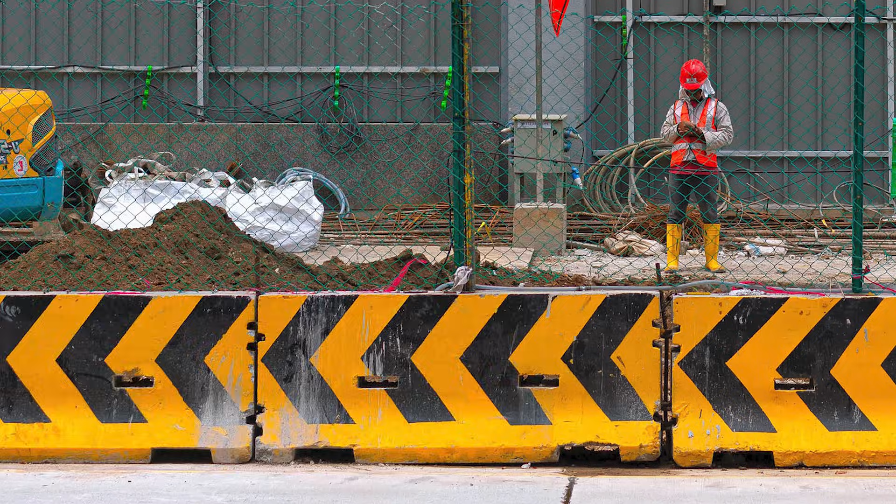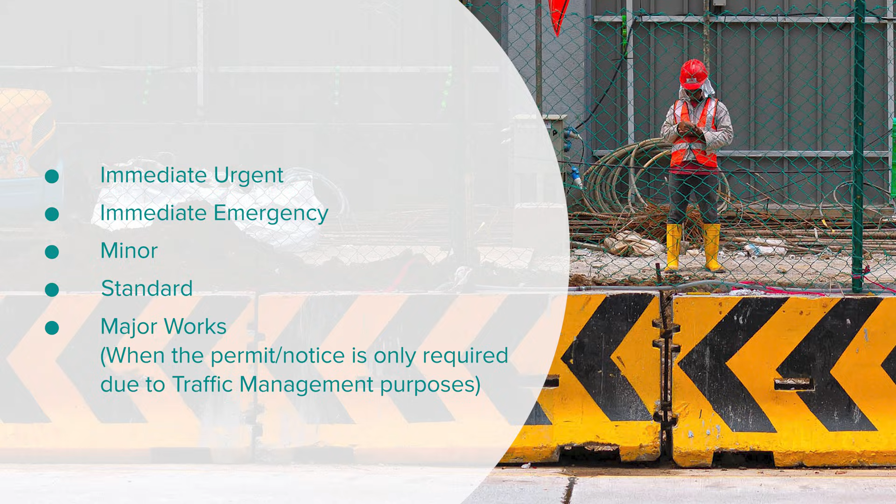From the 1st of October 2025, the Street Works UK protocol comes into place for all streetworks operating under immediate urgent, immediate emergency, minor, standard, major works when the permit or notice is only required due to traffic management purposes or equivalent notice periods for works on private land.

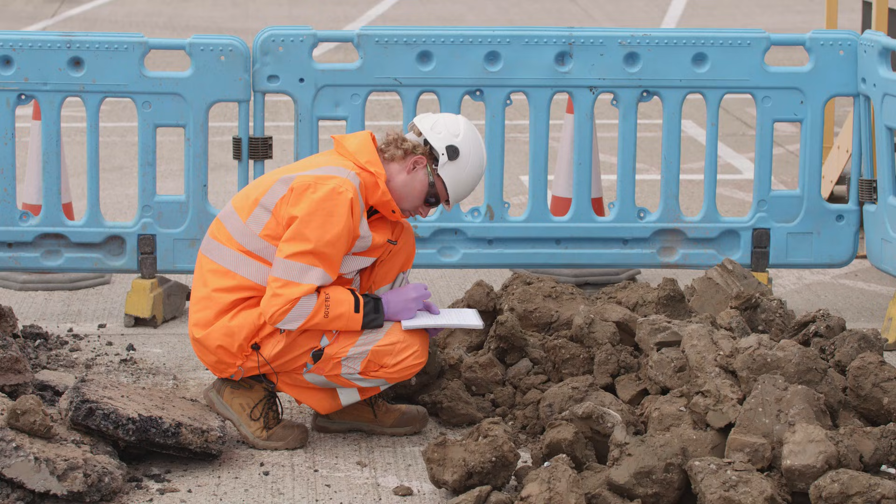The protocol requires a set of changes to current working practices, and the chapters in this video provide an outline of the requirements for individuals currently carrying out streetworks duties. It is a legal requirement to follow the requirements of the protocol, which are outlined in this video. Compliance will be checked and non-compliance enforced by the Environment Agency.

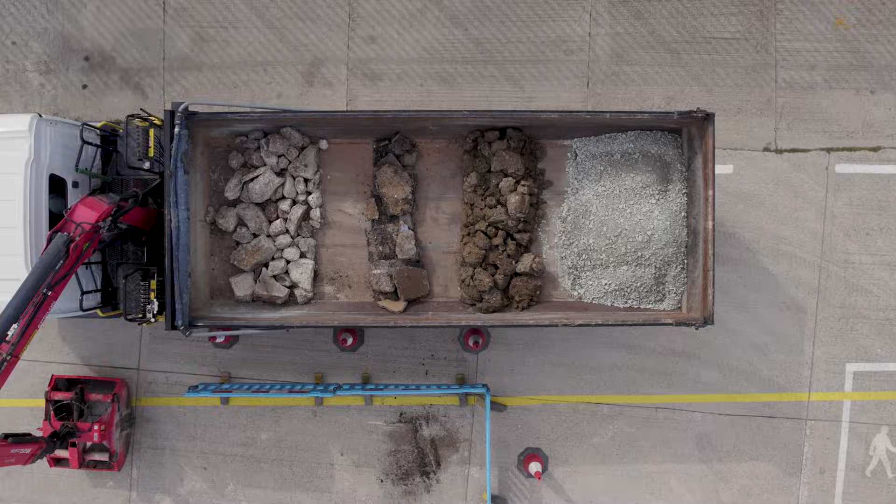This video will guide you through the Streetworks UK Waste Classification Protocol process. In this first chapter, we will be focusing on how to determine if your work activity is within scope and how to complete the desktop risk assessment effectively. Let's begin with checking to see if your activity is within scope.

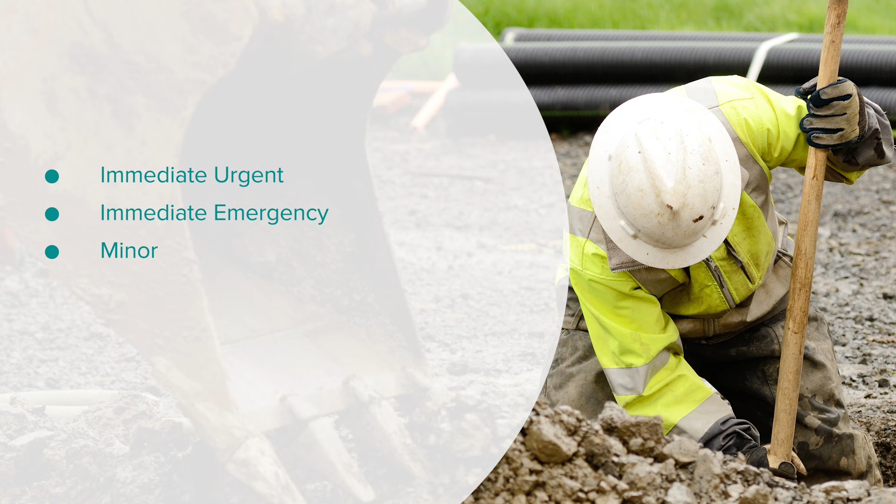Work is considered within scope if you're operating under any of the following highway permits: immediate urgent, immediate emergency, minor, standard, major works, but only when the permit or notice is required due to traffic management. These definitions are outlined in the New Roads and Streetworks Act 1991.

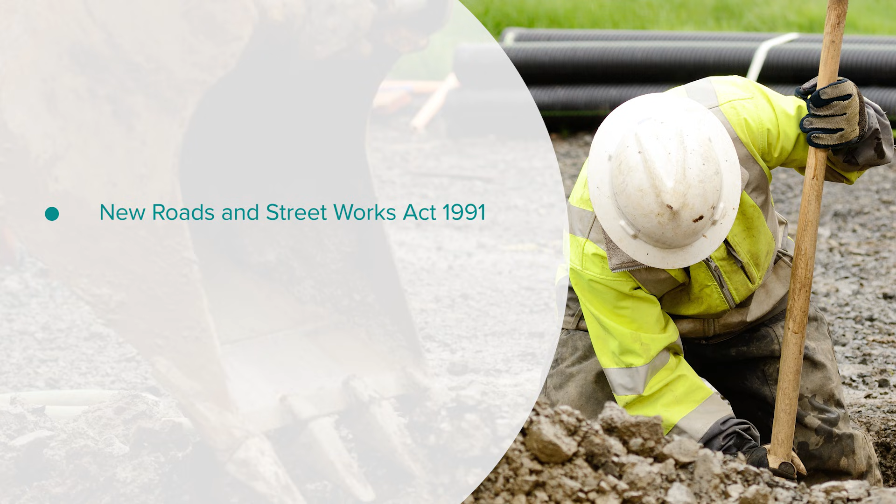You may also use the Street Works UK protocol for equivalent notice periods on private land. However, if your work falls outside this scope, you must follow the WM3 waste classification guidance instead. This will be works that are larger duration projects that are on major works permits or notices.

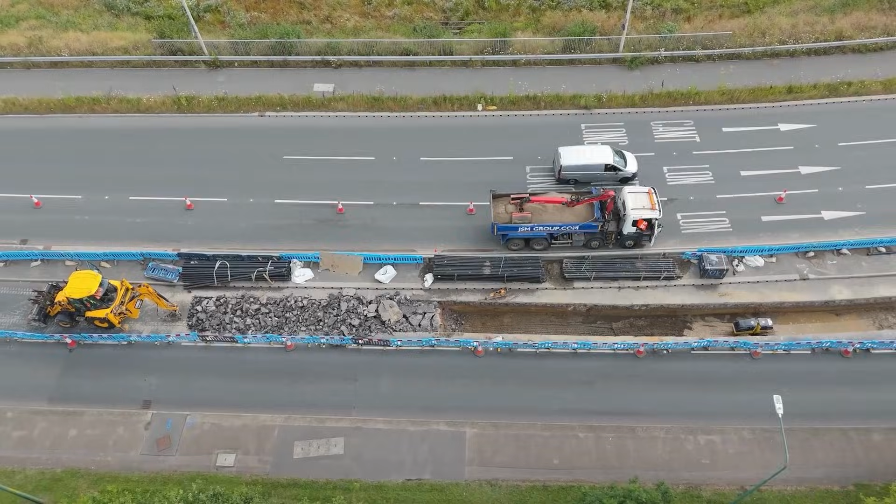The next step is completing a desktop risk assessment during the planning stage of each job where the Street Works UK protocol applies. The time to complete the desktop risk assessment should be at the raising of the permit or notice stage. The goal is to assess whether there is a low, medium, or high probability that excavated waste will be classified as hazardous or not.

You can download the official template from the Streetworks UK website, or you may be asked to use an equivalent version created by your organisation, which could be a paper or electronic version. The key is to ensure that whatever you use has the same question set as the Streetworks UK risk assessment.

The desktop risk assessment is split into 4 key sections: job details, Table A, central register check, Table B, desktop mapping review, Table C, risk assessment outcome. This section includes standard job information such as location, permit number, utility type, and highway surface type. Most of this data is readily available through the job promotion process.

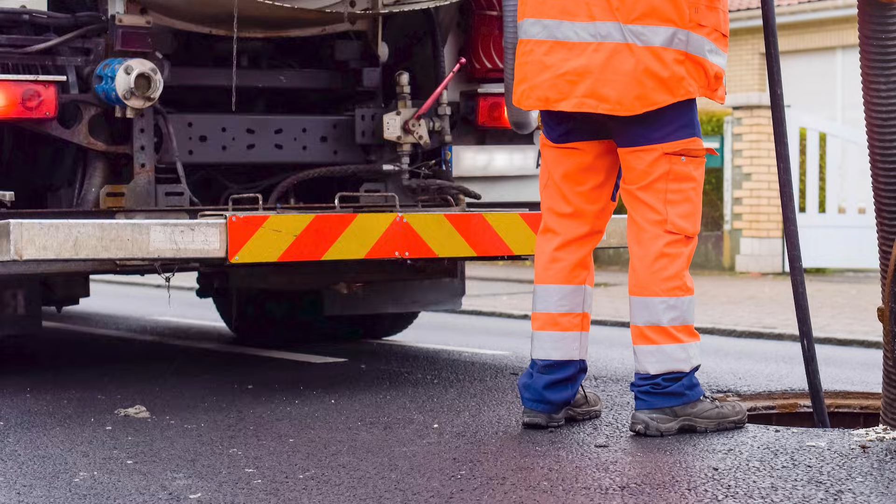Table B is a secondary check that is especially important for unsampled areas. You'll need to identify any existing or historical features within 25 metres that could indicate contamination. You can use sources like Google Maps, MAGIC, Data.gov.uk, Archie UK, and local planning data to identify these features. The form has a list of features or sites that you need to consider if they are near to your work site.

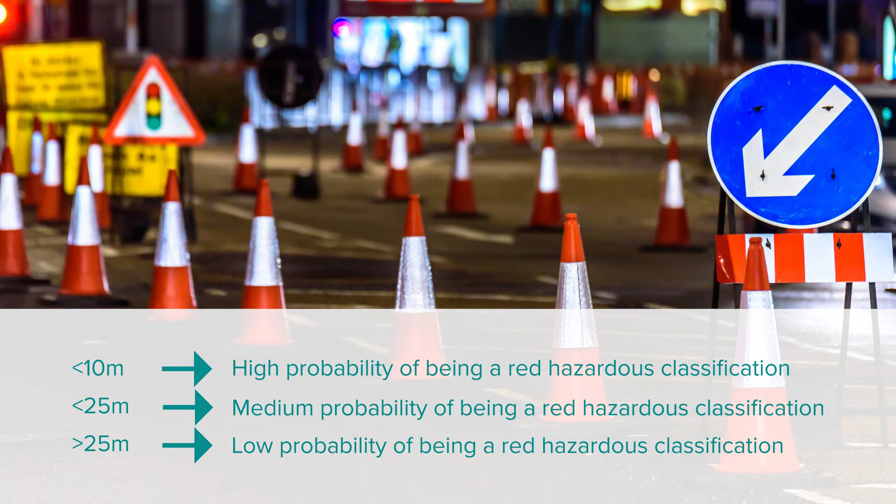The proximity of any premises that could be a source of contamination is important as it affects the risk classification. When you have measured the distance to the impacting feature, use these distances to determine whether the risk is high, medium, or low. It's important if you are taking measurements to measure the distance from the edge of the premises that could be a source of contamination, not from the center point.

Based on your findings in Table B, you must indicate whether there is a low, medium, or high risk of hazardous waste being present on site. If the majority of observations are classified as low, but one is high, then the overall classification must be high.

Finally, ensure that a copy of each completed desktop risk assessment is retained for audit purposes. As a minimum, records should be kept for 3 years, in line with your organization's document and record control arrangements.

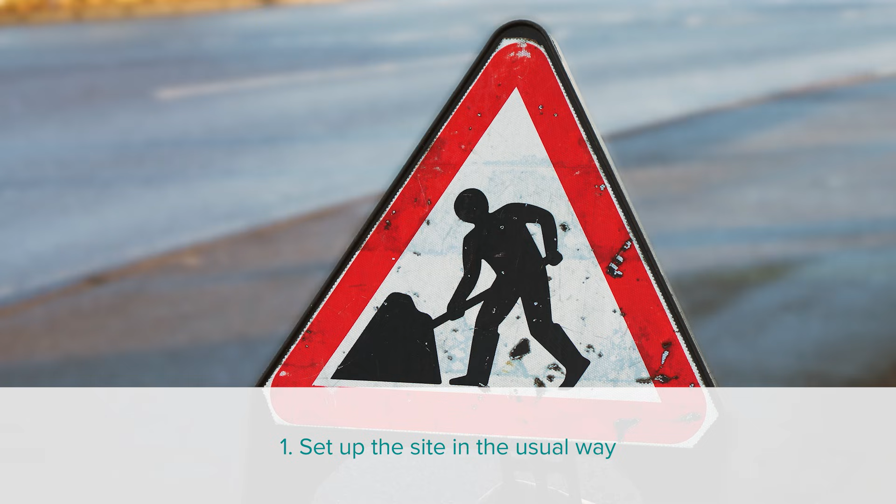In this training video, we will go through the excavation process and what needs to take place on site. 1. Firstly, when you arrive on site, you should set up the site in the usual way, considering what signing, lighting, and guarding you need to complete the works and keep the site safe for road users and pedestrians. 2. Carry out your site-specific risk assessment and any other paperwork as normal, as required by your organization.

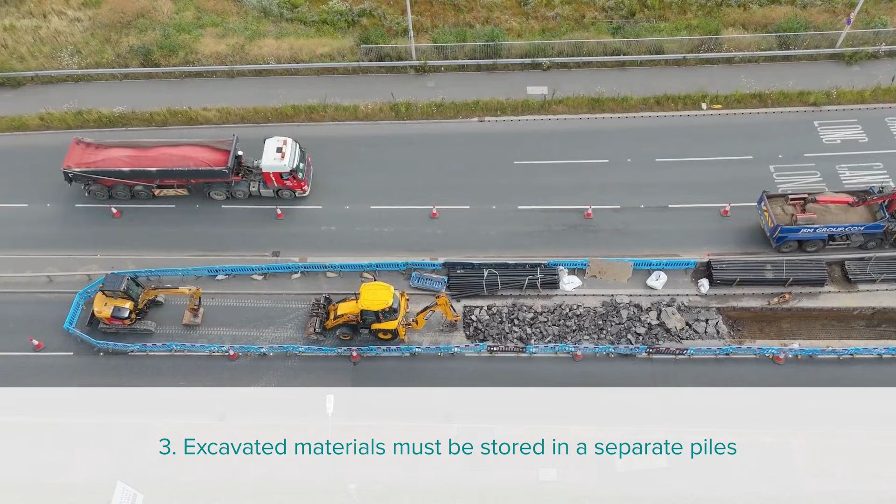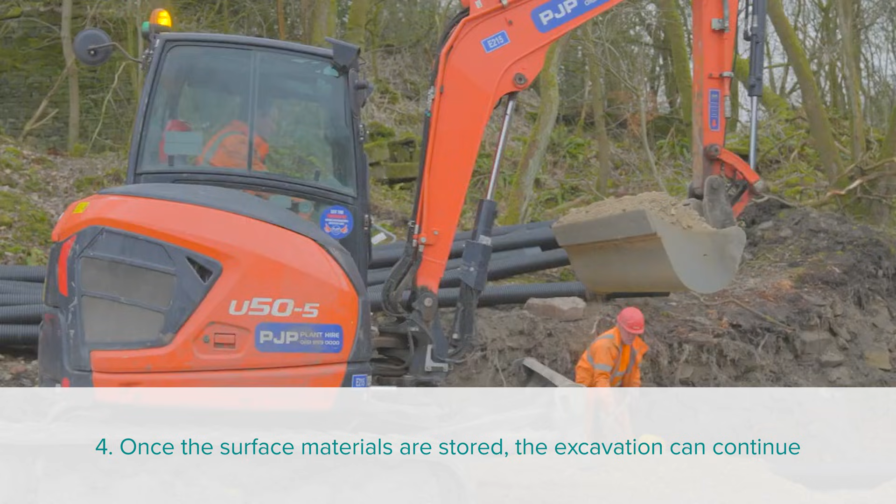3. As you excavate the works, the surface materials, whether they are tarmac, concrete, flags, blocks, or other materials, must be stored in a separate pile, either for disposal or reuse. 4. Once the surface materials are stored, then the remainder of the excavation can continue, with the subbase and subsoils being stockpiled in a separate pile to the surface materials.

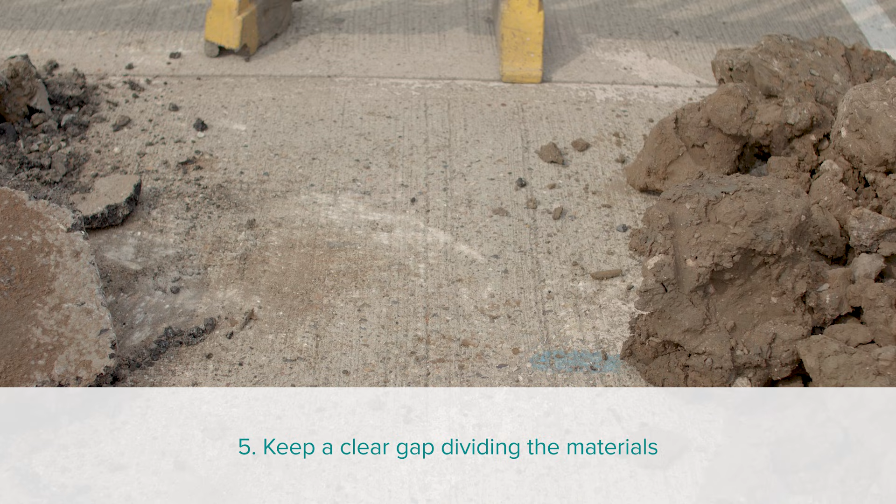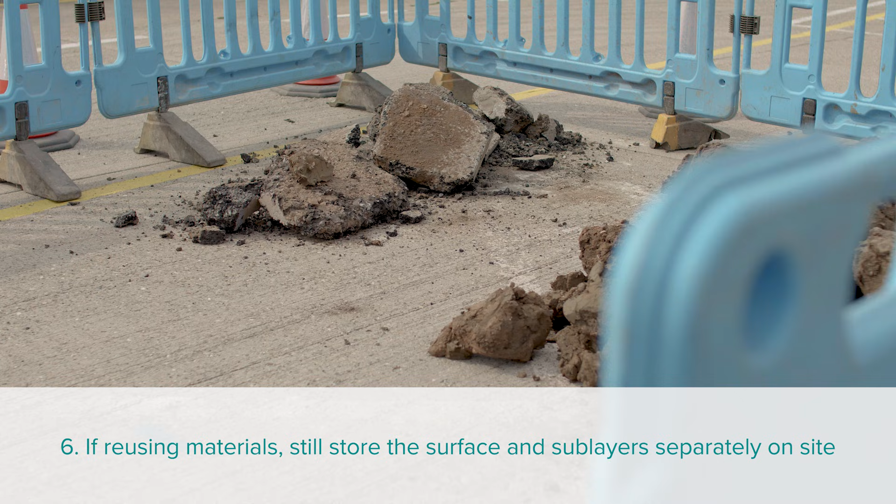5. Try to think about the next team coming to collect the surface and sublayers separately. There should be a clear gap dividing the materials to make it easier for them to collect. 6. If you are going to reuse the materials back in the excavation, then the surface and sublayers still need to be stored separately on site.

In the next video, we are going to talk about the site assessment that needs to be carried out to assess the materials. Remember that we can only assess the materials if they've been segregated. Once you have segregated your materials on site, you need to carry out a site assessment to classify the waste.

In this chapter, we are going to show you how to fill this in using the Streetworks UK site assessment form. However, your company may have their own standard form, or they may ask you to complete the same questions on an app. It doesn't matter the format as long as the questions are answered. Here is where you can find the Streetworks UK version of the form.

The assessment is to be completed after opening the excavation and once the utility asset has been exposed and is ready for the activity you are going to carry out on it. 1. The top part of the form, or the first questions you have to complete if you are using an app, should all be available on your job pack. It should be simple to fill in for you. 2. There are then 7 short questions to answer.

Question 1. Are there any signs of asbestos fibres or asbestos-containing materials in the excavation? You should have had some training on asbestos awareness, and it is a simple yes or no answer. If asbestos is present, follow your normal company procedures. The rest of the assessment form does not need to be completed.

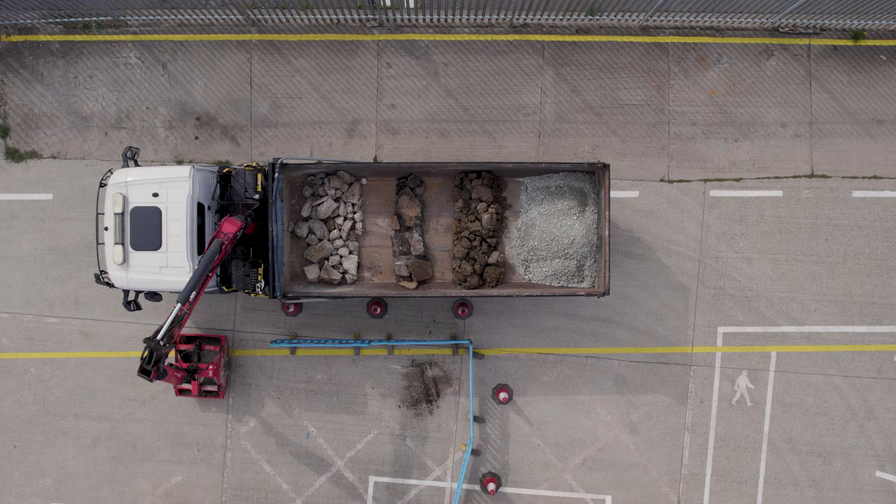Please note that if the material is going to be reused on site without adding any additives, then the site assessment is not required. However, if material is going to leave site and be reused elsewhere or disposed of, or it will be reused with an additive, then the site assessment is still applicable and is a mandatory requirement.

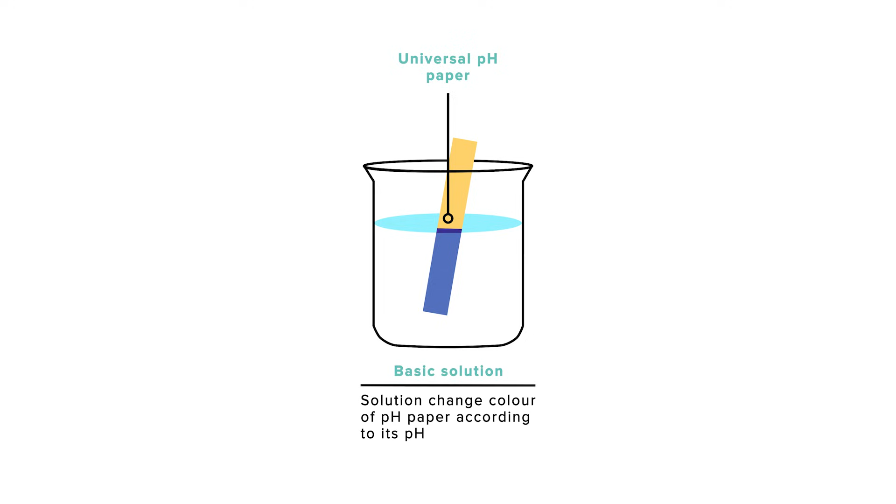Testing soil pH is an important step in correctly classifying excavated materials. Soil pH is not visible, but it can impact how we manage materials on site, especially when high pH levels are present. Litmus testing is not mandatory within the Street Works UK protocol. It is strongly recommended to ensure that waste is classified correctly. Let's look at how to test using universal litmus paper effectively.

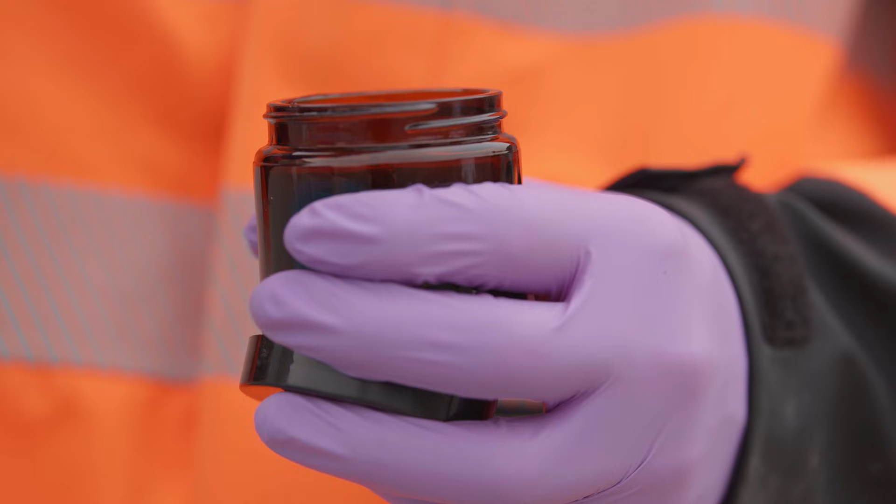To begin the test, your soil sample must be wet. If the soil is dry, mix it thoroughly with clean water to create a moist, workable sample. Now apply the universal litmus paper to the wet soil. The colour reaction happens quickly, usually within 10 seconds. Compare the colour of the test strip to the standard pH chart provided.

If the result falls between pH 1 to 4, low, or pH 10 to 14, high, this is considered positive and the site assessment question answered yes. If the result is between pH 5 and 9, it's considered negative and the site assessment question answered no.

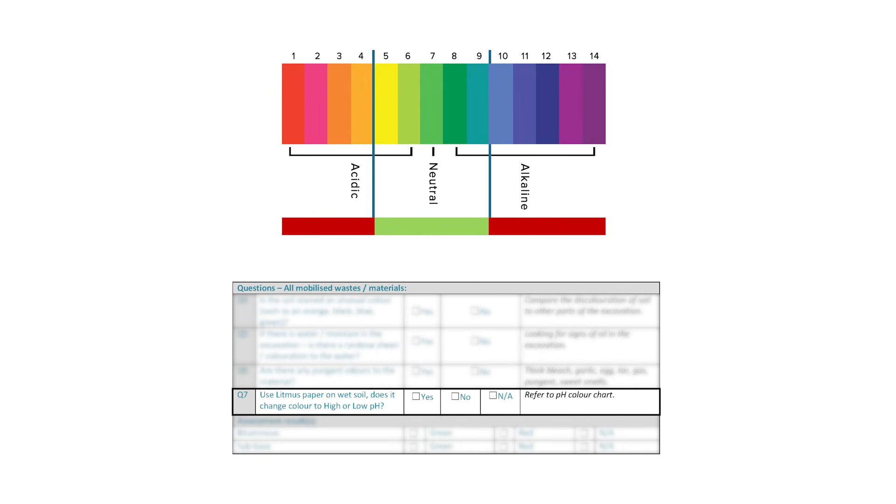Be cautious when you are doing the testing. If broken concrete is present in the excavated material, avoid testing soil near it. Concrete can artificially raise the pH and cause false high readings. This is important as it may be compared later to random checks using lab testing for accuracy. Now you can record the result clearly on your site assessment form. Soils with high pH are a critical factor in the classification of excavated materials, so accurate pH testing supports better site decision making.

Polycyclic aromatic hydrocarbons, or PAHs, can be harmful substances found in some bituminous materials, particularly those containing coal tar. PAK testing live on site is not mandatory, but is strongly recommended to assist in the identification of hazardous waste on site. Let's walk through the testing procedure step by step.

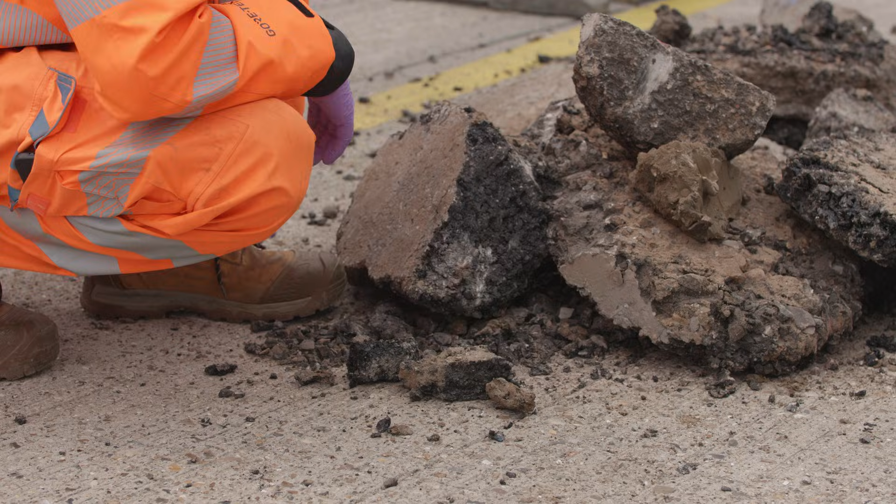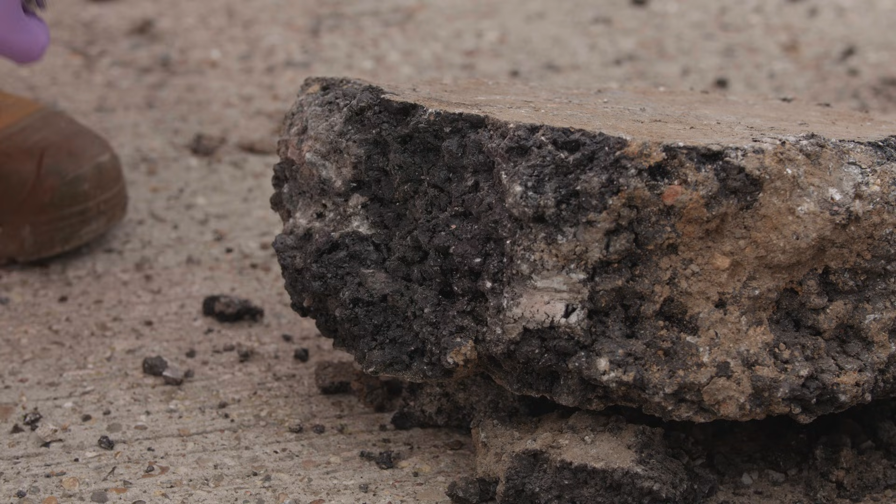Start by selecting a clean, dry and non-smooth exposed face of the bituminous material. This will ensure proper absorption of the PAK spray. Shake the PAK spray bottle well and apply it evenly over the prepared surface. Allow 5 full minutes to pass. This gives the spray time to react with any PAHs present in the material.

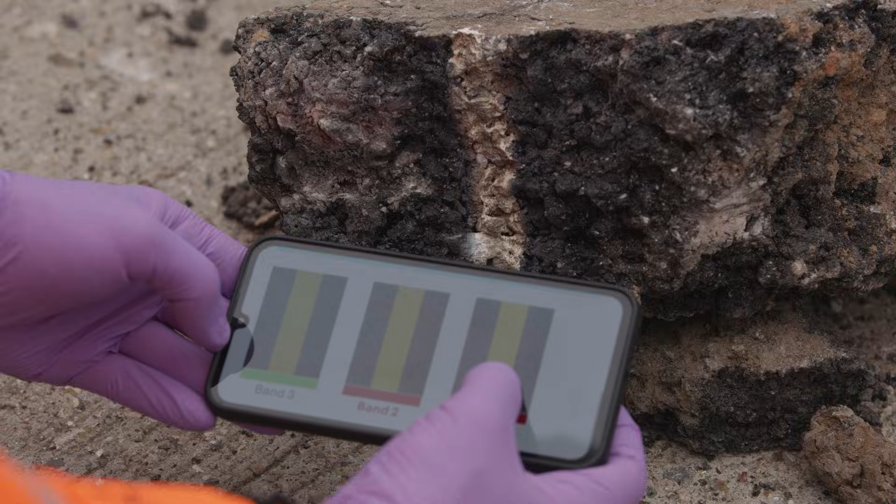Now, compare the resulting colour to the reference bands provided by Streetworks UK, which are Band 1, strong positive, Band 2, weak positive, Band 3 to Band 6, negative results. If the colour matches band 1 or band 2, record the result as yes on the site assessment form. If the colour matches band 3 to band 6, record the result as no on the site assessment form.

And that's it. Always remember to conduct the test in a ventilated area, wear the appropriate PPE, and dispose of any used materials responsibly. The PAK spray test is a fast and effective way to help identify potentially hazardous materials. This may also be compared later to random checks using lab testing for accuracy.

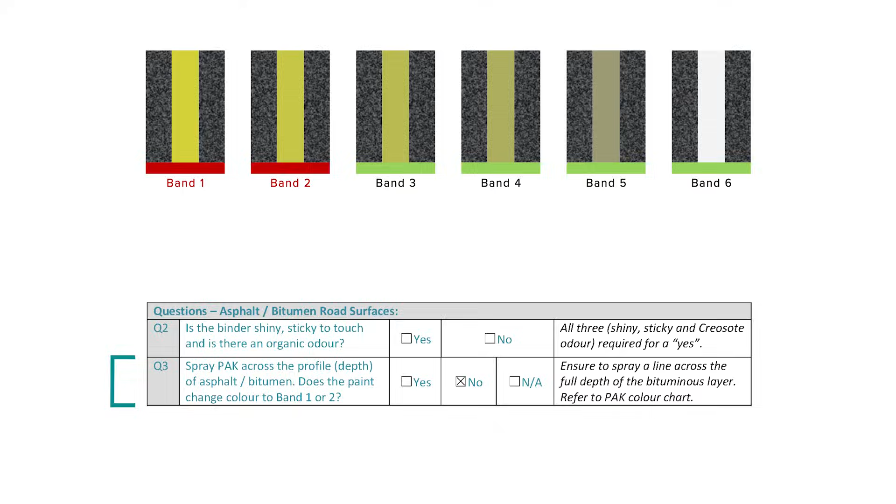Under the Street Works UK protocol, there is a requirement to carry out a small percentage of tests to check the accuracy of the site assessment that has been completed previously. The responsibility of taking these samples may be with the client or the contractor, and this will be decided on each contract individually.

In this video, we are going to show this process starting with collecting the material we want to sample test. However, you cannot simply take samples from 1 or 2 sites. You must adopt a randomized approach to selecting the sites you are going to use for sample testing, and must be able to demonstrate how you propose to do this.

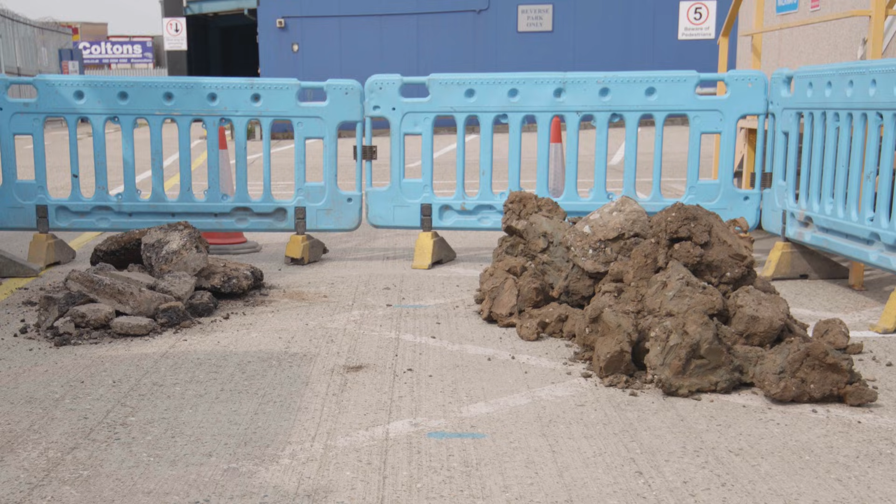Sample testing must be carried out by a trained individual, and samples taken from each stockpile of segregated waste. During your training, it will have been explained how to take a sample and what equipment is required. There is also more details on this in the sampling requirements document.

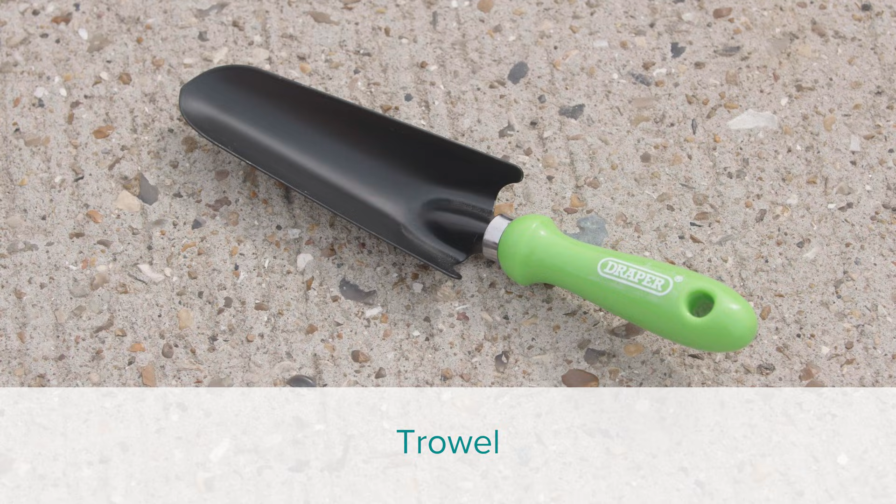Here are the tools that you may need when collecting your samples. Nitrile gloves, trowel, permanent marker pen, cool boxes, bubble wrap, courier labels, sample chain of custody forms, camera and notepad. You will also need the following sampling jars, tubs and bags. One 1 kilogram white tub, one 250 milliliter amber jar, one 60 milliliter amber jar, one 1 kilogram sealable plastic bag.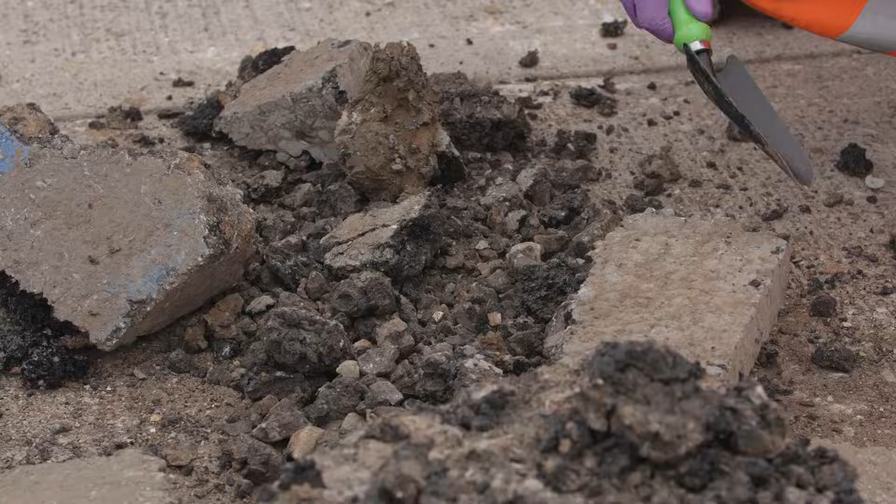To avoid cross-contamination between sampling different excavated waste types, trowels must be cleaned by pushing into the soil a number of times before collecting the sample, or alternatively rinsing with deionized water. Gloves must also be changed between each sample.

So this is the actual sample process. Take one sample from each type of material stockpile. For example, if there's a pile of asphalt and bitumen, take one sample from that pile. If there are other types of materials, take a separate sample from each pile. For example, one sample from the asphalt pile, another from the sub-base pile.

Samples must be taken before the materials leave the site, within 24 hours of excavation. It's best practice to sample the material as it's dug up and stockpiled on the same day or shift. Each sample should be made up of material from 2 to 3 different spots in the stockpile, including one from the outside and one from the inside. All parts go into one container to make a single sample.

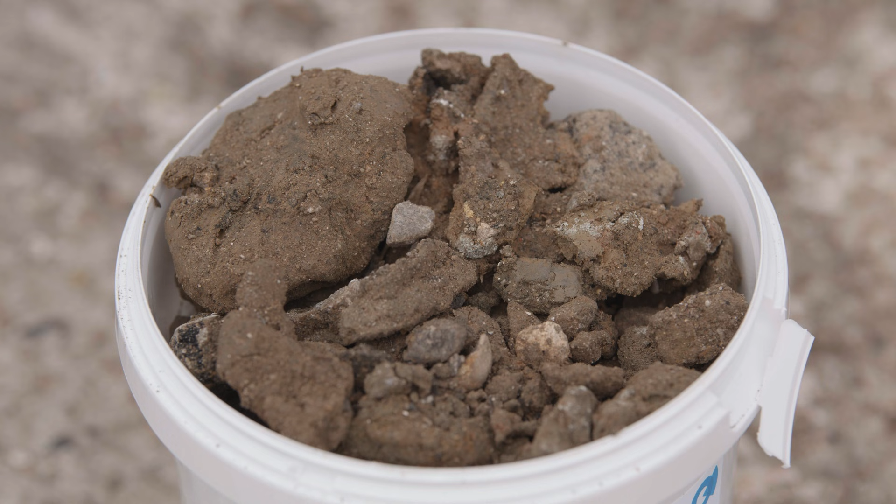Each stockpile should only contain material from up to 20 meters of excavation to keep the sample consistent. Take one sample for every 10 cubic meters of material. To give you an idea of the number of samples to be taken, less than 10 cubic meters equals 1 sample. 11 to 20 cubic meters equals 2 samples. 21 to 30 cubic meters equals 3 samples.

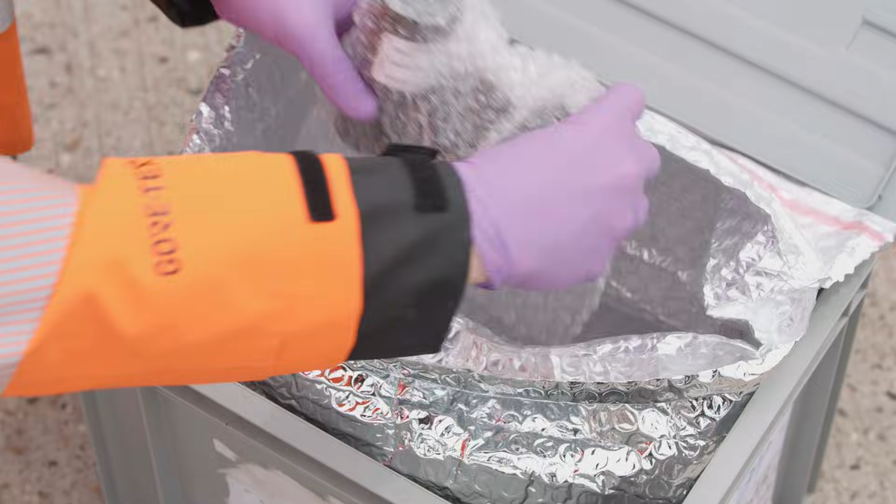Do not sample material from the excavation walls or floor if it's going to stay in place. Ensure that all sample amber jars are filled to capacity. Once you have collected the material, it now needs to be sent to a UKAS accredited laboratory for further testing. Place the collected samples in a cool box with ice packs or a fridge immediately.

Before collection, protect samples using bubble wrap or similar packaging inside the cool box, or wrap each container individually. Complete a sample chain of custody form before samples are collected or removed from the site. And that's it.

So now we've conducted a site assessment and, if applicable, collected our samples. We now need to remove the excavated material from site. You may recall that when you completed the site assessment template, you were asked to classify the material as red, hazardous, or green, non-hazardous. This information will be of high importance to the organisation moving the waste and will indicate how and where they transport the material. When planning how material is collected, it is important that you continue to maintain segregation of bituminous and sub-base layers.

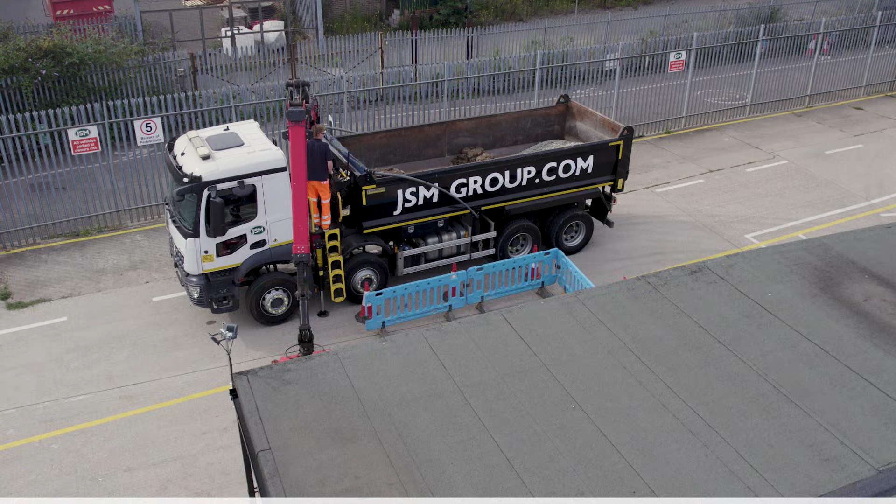Even more importantly, you can only carry green, non-hazardous, sub-base, and bituminous in a grab or vehicle. If you have red, hazardous, sub-base, and bituminous, then they need collecting separately or ensure material is fully quarantined away from non-hazardous material. You must include sufficient detail on the transfer documentation, such as a waste transfer note, to enable the waste to be traced to the excavation it was produced from. This must include the work permit number or work order number and excavation reference.

Anything classified as red must be transported to a suitable disposal or treatment site. The information you provide on the waste consignment note should highlight this in precise detail, including waste EWC codes and estimates of concentration level of hazards. Remember to keep local records of all risk assessments and waste transfer notes. You may be asked to produce these at any time in the future.

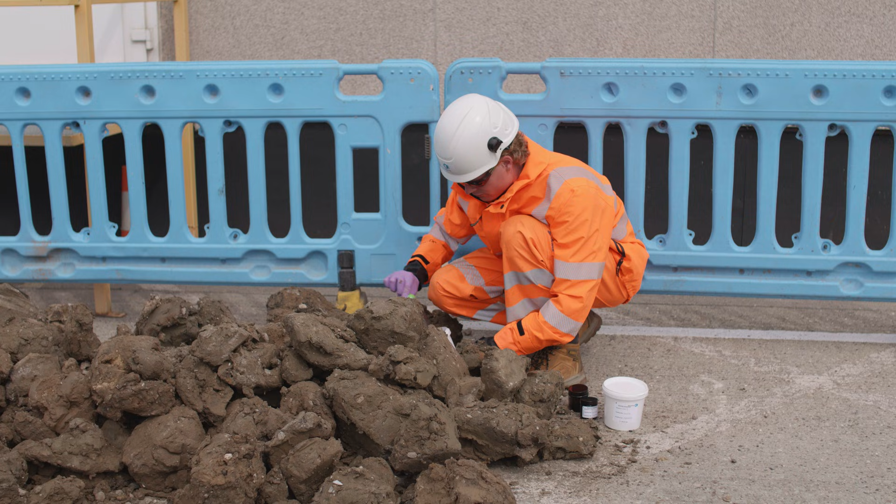In this video, we will look at the storage on site of excavated material, segregation, collection, yard storage, transfer, and the associated documentation. All excavated material on site must be segregated into separate piles of waste streams. For example, bituminous in one pile and sub-base in an alternate pile. This is to allow material assessment per waste stream and assist in the waste collection and transfer. In addition, the materials must also be separated on the waste transfer vehicle.

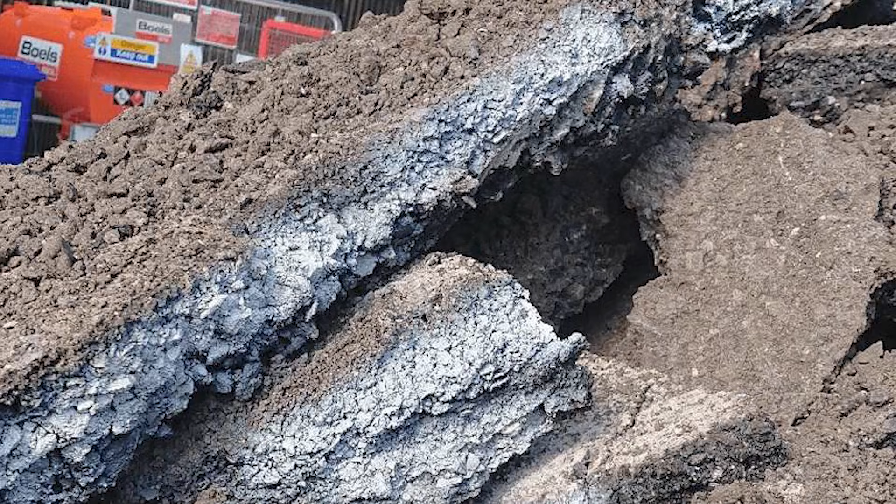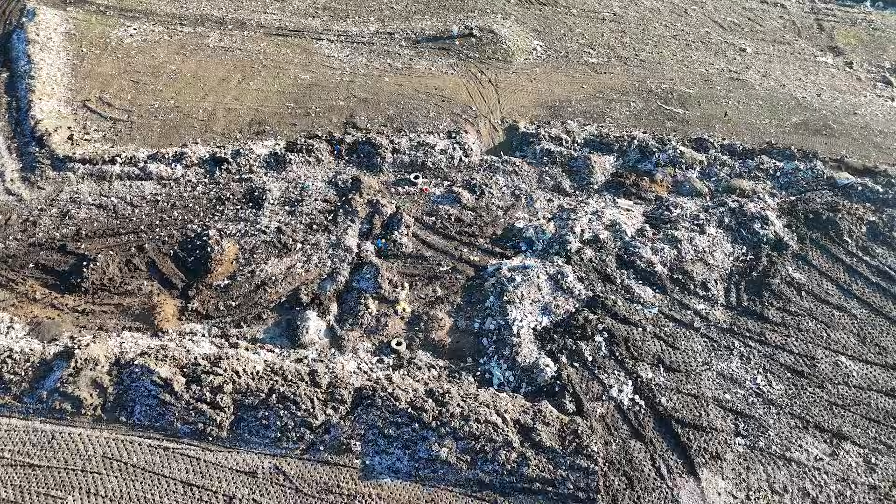Excavated waste is generally considered hazardous if the material or substances pose a risk to humans or the environment. Some examples of hazardous waste include asbestos, chemicals such as brake fluid, diesel, petrol, and coal tar. Depending on the site assessment outcome defined in previous videos, the material will either be deemed green, non-hazardous, or red, hazardous. This classification will determine the action required in respect of whether it then needs to transfer to a local depot for potential recycling or to a general landfill that can take non-hazardous or hazardous waste.

In all cases, the waste material must be correctly handled, and all paperwork must document the material's current location, transporter, disposal site, and then exported to a designated waste transfer depot. The excavated waste material is only ready for collection once the site assessment has been completed and the materials correctly classified. Information on material classification must be shared with those collecting the material to ensure red, hazardous, and green, non-hazardous classified materials continue to be segregated from one another, both during collection and transit, to a location where it will be managed and/or treated accordingly.

There are two types of transfer notes: a waste transfer note, which is required for green, non-hazardous materials, and a consignment note, which is required for red, hazardous materials. Each form must contain relevant permit or work order numbers and excavation details of where the material has been collected from. For consignment notes, an estimate of the hazard present and the concentration level of that hazard needs to be included on the form. Ensure the correct European Waste Catalogue numbers are captured for the materials.

If the same company is producing, transporting and storing green, non-hazardous material in a depot or recycling facility, then only a record is required. If a waste transfer or consignment note is required, it may be completed in paper form, or on any contractor paperwork or app, so long as it includes all the required legal and Streetworks UK protocol information. It should be noted that most of the waste receiving sites will require a copy of the waste transfer note or consignment note.

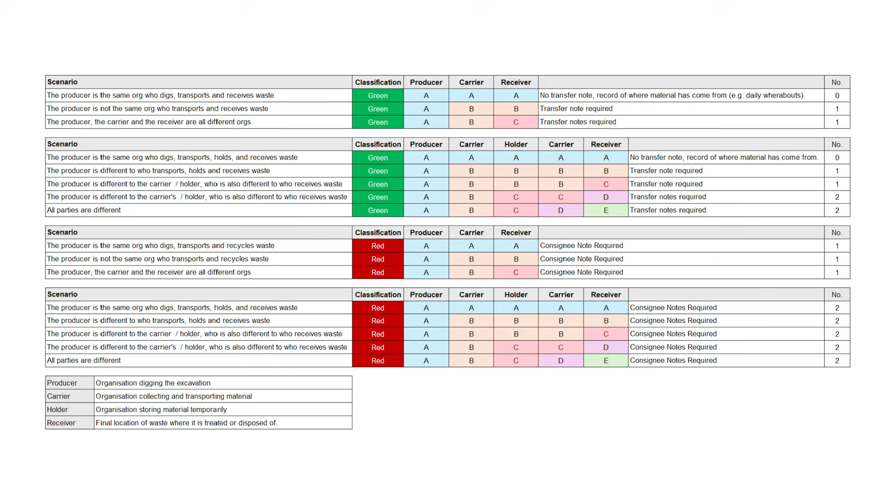Here are some of the scenarios that you may encounter that would determine whether you need to produce a waste transfer note, consignment note, or nothing at all. For more advice on this and to understand what you need for your work, please speak to your line manager for clarification.

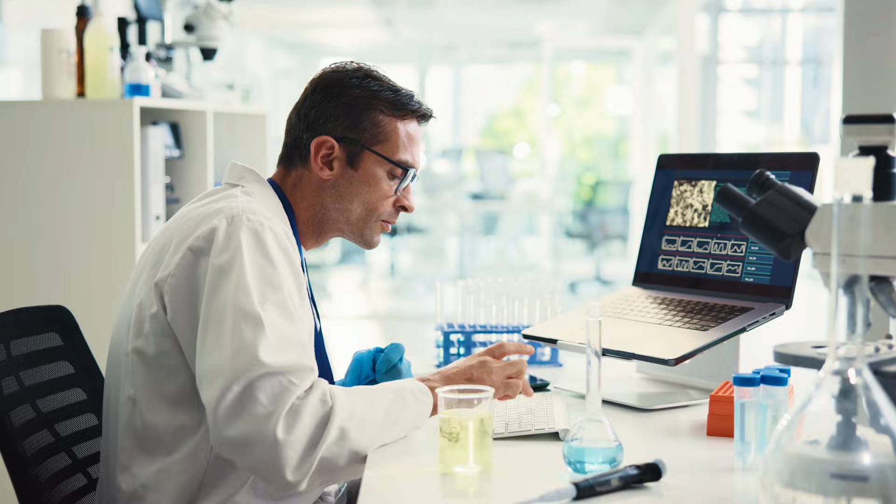In this chapter, we will go through the 6 essential steps for managing and reporting sampling results under the Streetworks UK protocol. This process is critical for maintaining compliance with the Environment Agency and ensuring our operations remain efficient and low risk. When we receive sampling analysis from a UKAS accredited laboratory, the first action is to complete the Street Manager Upload Certificate template. This document is downloadable from the Streetworks UK website and must be filled out by an appointed person within your organisation.

The key fields to complete include location details. Ensure accuracy using what3words or postcode. Permit number and work order. These link the sample to the specific excavation. Surface location, for example, footway, carriageway or verge. The final 2 sections of the form require you to input the lab's classification of the bituminous layer and sub-base. Red equals hazardous, green, non-hazardous. Accuracy here is vital because the data feeds into the National Streetworks UK database, which informs future risk assessments and regulatory decisions.

Once the template is complete, the appointed person must log into the Street Manager portal and upload the record. Why is this important? Street Manager joins up all results from all organisations that are inputting data. It builds a central register that will help support doing the desktop risk assessments.

The Environment Agency expects continuous uploads, so it is important not to delay or batch submissions. Failure to upload promptly can result in non-compliance and may affect your organisation's standing with the Environment Agency, leading to the potential of increased sampling volumes.

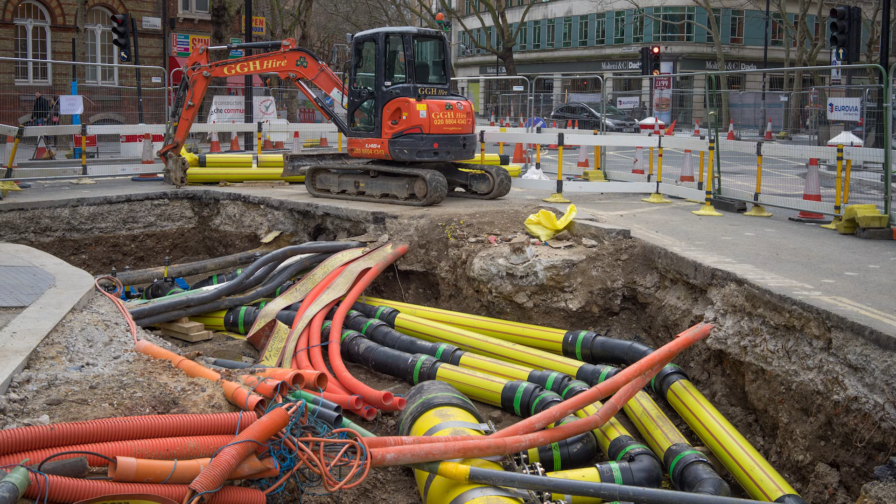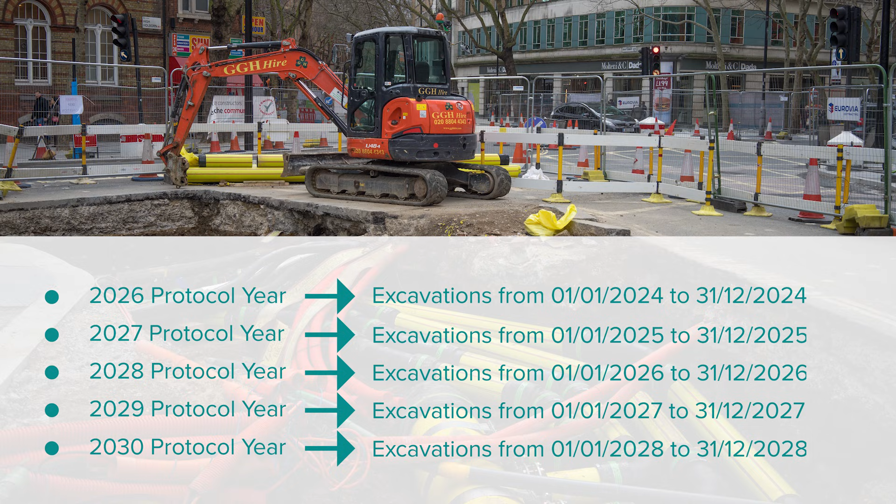The sampling burden for each calendar year is calculated on 2 factors. Factor 1 is the number of excavations completed within the scope of the Streetworks UK protocol 2 calendar years prior, which is used to calculate your sampling volume as shown on the screen.

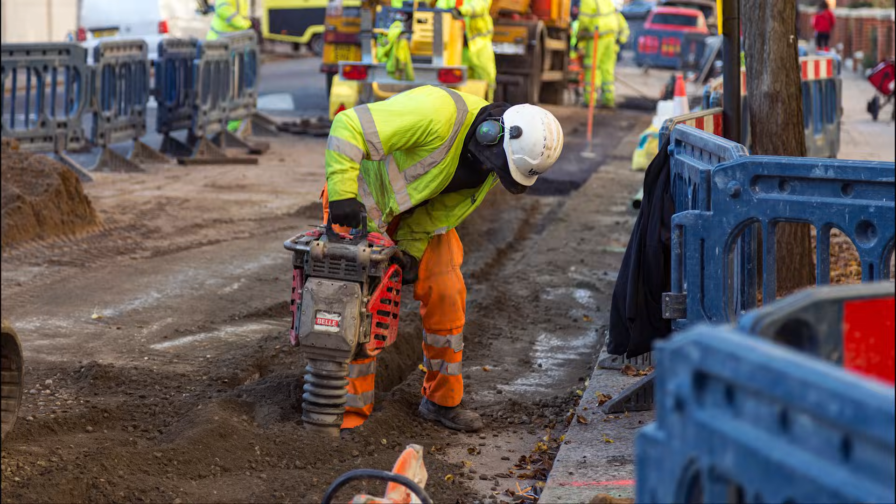Factor 2 is the sampling accuracy from the previous calendar year, which determines the percentage of excavations that must be sampled. Over 93% accuracy, sample 1% of excavations. 85 to 92.99% accuracy, sample 2%. Below 85% accuracy, sample 3%.

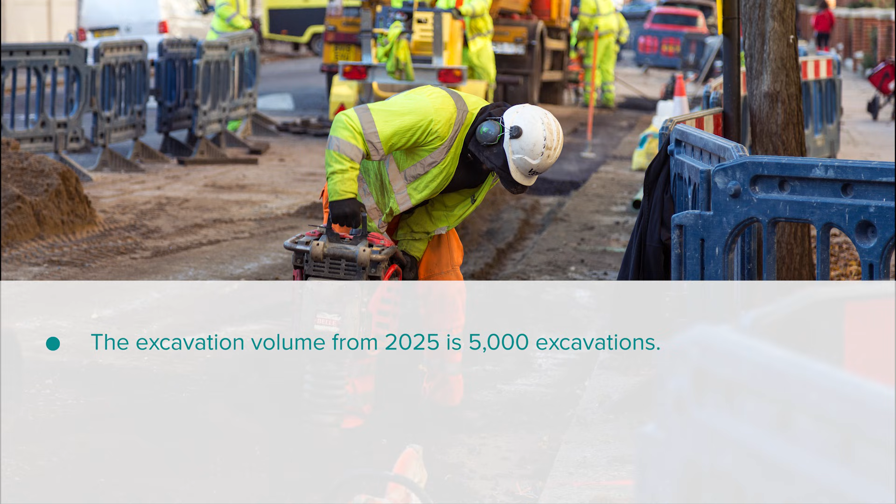Here is an example. Let's say your organisation is calculating its sampling burden for 2027. The excavation volume from 2025 is 5,000 excavations. The sampling accuracy from 2026 is 90%. Required sampling rate 2%. Result: you must submit 100 samples for lab analysis in 2027, i.e. 2% of 5,000.

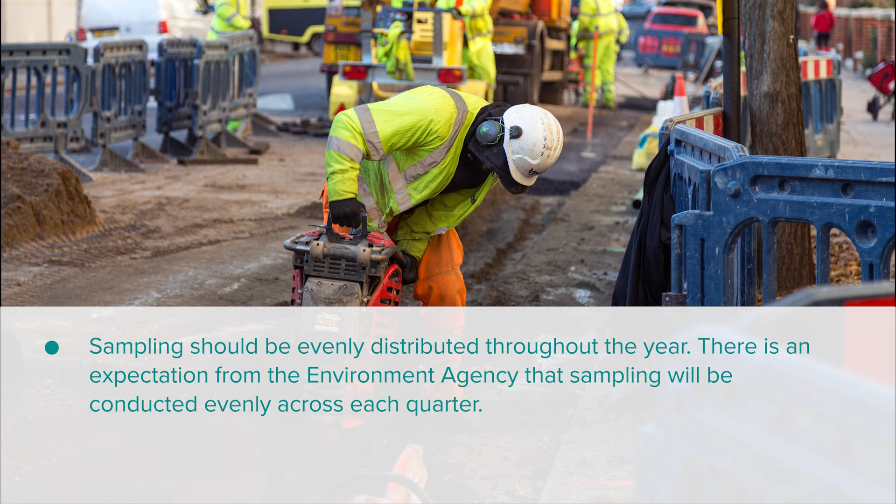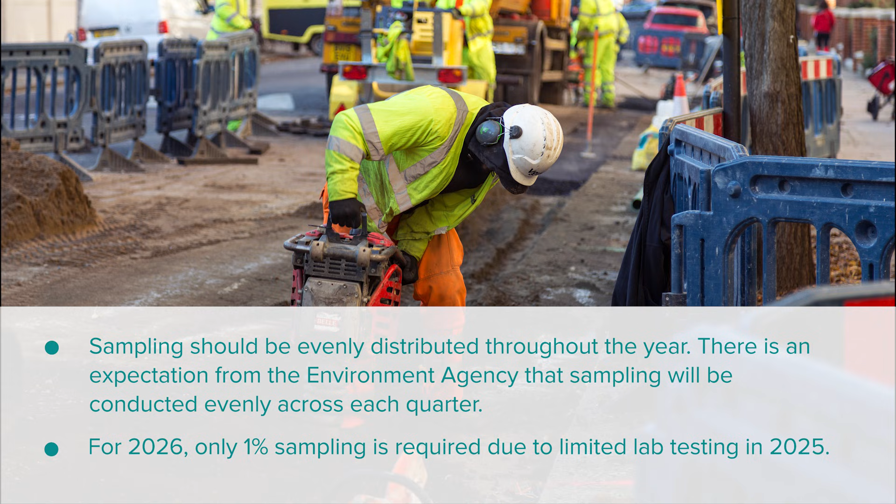It's important to note the following. Sampling should be evenly distributed throughout the year. There is an expectation from the Environment Agency that sampling will be conducted evenly across each quarter. For 2026, only 1% sampling is required due to limited lab testing in 2025. These are minimum requirements, and of course, organisations may choose to sample more frequently for assurance or internal quality control.

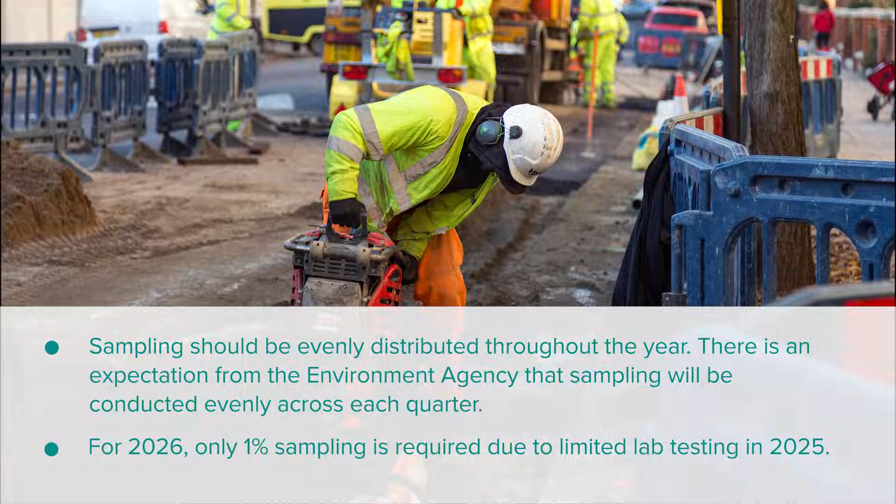Once you have calculated your annual sampling requirements, you must inform Streetworks UK and include the data used to make your calculation. This should be emailed to info@streetworks.org.uk. The subject of the email should be titled SWUK Protocol, the year, excavation volume, and the organisation name.